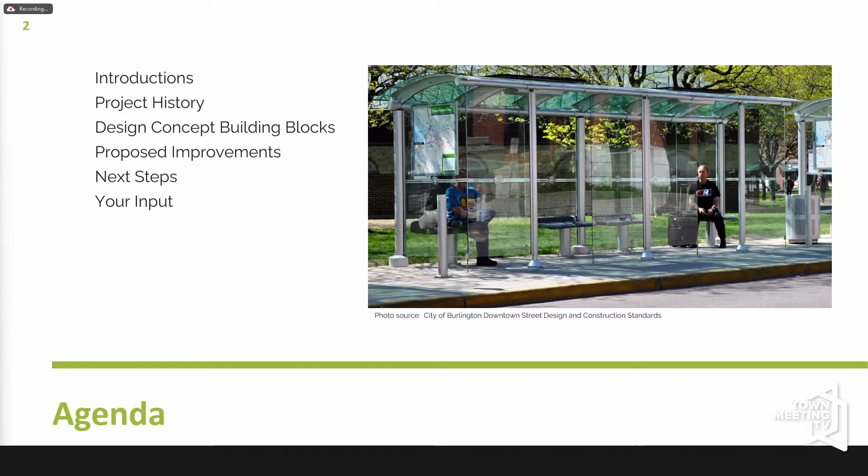Brief rundown of the staff, which we just went through. This project actually started back in 2016, when voters approved a tax increment financing, TIF-funded project for improvements to Bank and Cherry Streets.

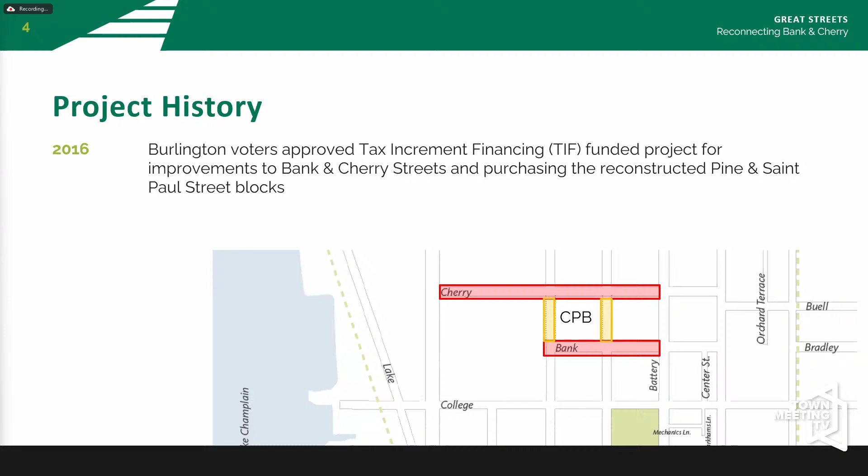This also included funding to purchase Pine Street and St. Paul Street from City Place Burlington, the developers. With that funding, the city advanced designs for Bank Street and Cherry Street. At that point, the project ended at Church Street, which is the boundary of the TIF district. They got city council approval for their concept in May of 2018 and advanced the design to the 75% phase, so it was pretty fleshed out at that point.

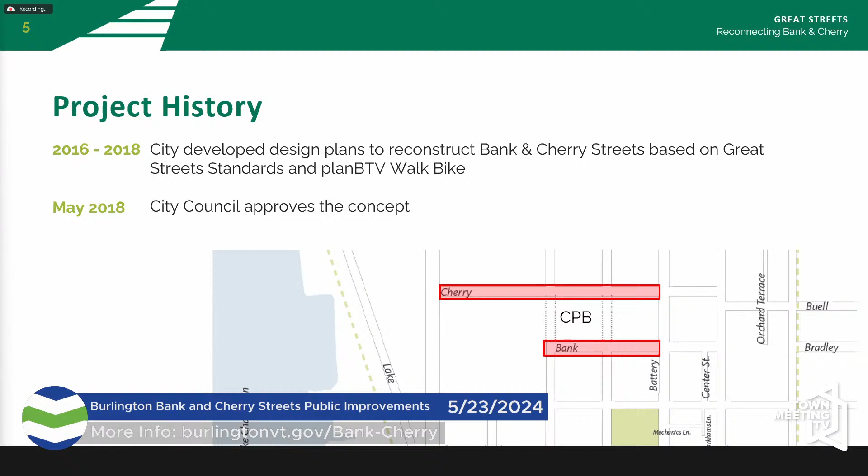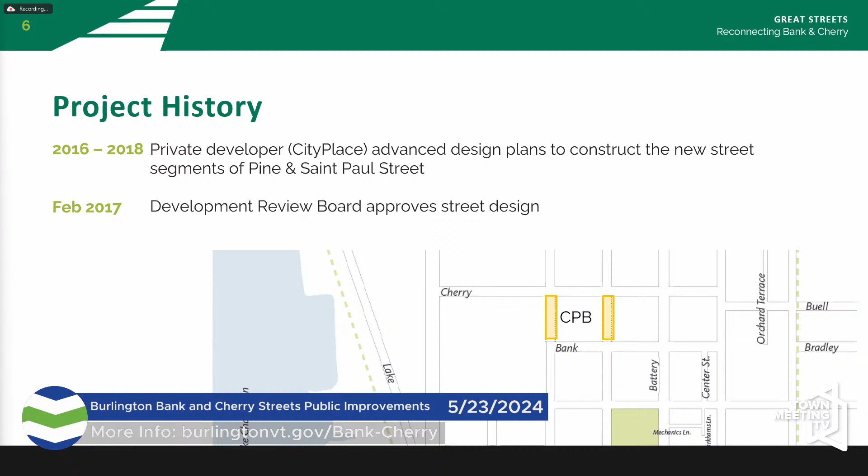Simultaneously, the developers were developing designs for the St. Paul and Pine Street segments that are reconnecting the downtown. They were going through a different process and were approved by the Development Review Board in February of 2017 for the concepts of that street.

Then in 2018, the City Place project, which was providing our TIF funding, stalled. And so what we affectionately refer to as 'the pit' was born. All of the street project paused as well.

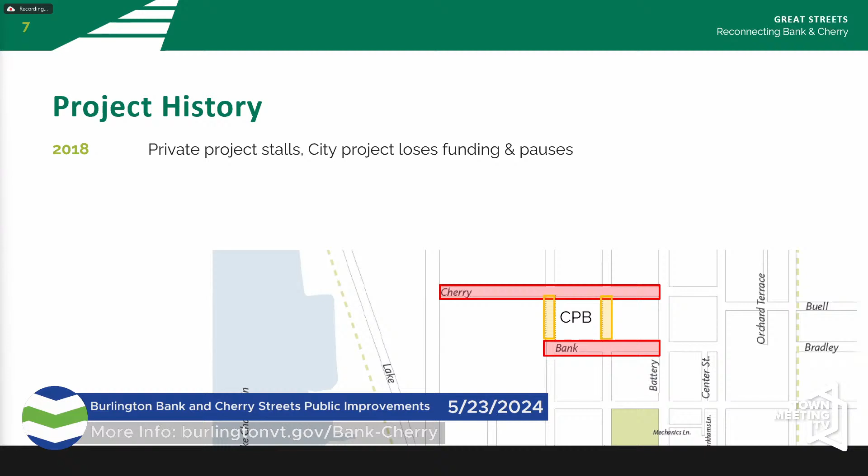Since then, the city has been looking for different funding opportunities so that our street reconstruction wasn't tied to the TIF funding anymore. Last year, we were fortunate to receive two big federal grants. We got $12 million from the congressionally directed spending from Senator Leahy, specifically for Cherry Street. And we also got a $22 million RAISE grant to add the Bank Street and Pine Street and St. Paul Street segments.

With this new federal funding, we're not constrained to just the TIF district anymore. So we were able to add the most eastern blocks of the project area and rebuild the entire corridor for both Bank and Cherry going all the way to Winooski Avenue, so that we have a consistent corridor.

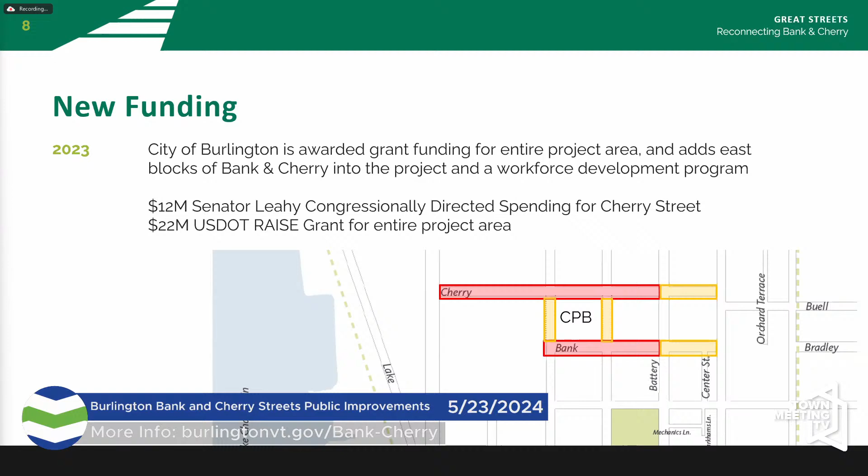As part of the RAISE grant, we were also awarded funding for a workforce development program that our Business and Workforce Development Department is managing for us. And Cara from the city's Workforce Development Department is going to talk a little bit about that.

Great, thank you. Hi, I'm Cara Al-Nasrawi, the Director of Business and Workforce Development for the City of Burlington. A trend that we're now seeing in some of these large federal grants for large capital projects is a workforce development portion that goes along with the grant. So my team will be managing that portion. It breaks out to roughly $1.5 million.

We are supporting Burlington residents in either building a new skill set or changing their skill set. We will be partnering with local organizations who are accredited in this curriculum space, and we will be running throughout the project cohorts of students who will learn about Construction 101, Weatherization 101, and things of that sort. So it's actually a really great opportunity that this grant comes with this funding as well.

So the city is not only completing this project with these funds, but we are also able to provide fully funded training, which would include childcare. When they graduate, they would have a set of tools, heavy equipment operation skills, and through these programs they will also have on-the-job training, including on the project itself. We'll be managing that for the next four to five years.

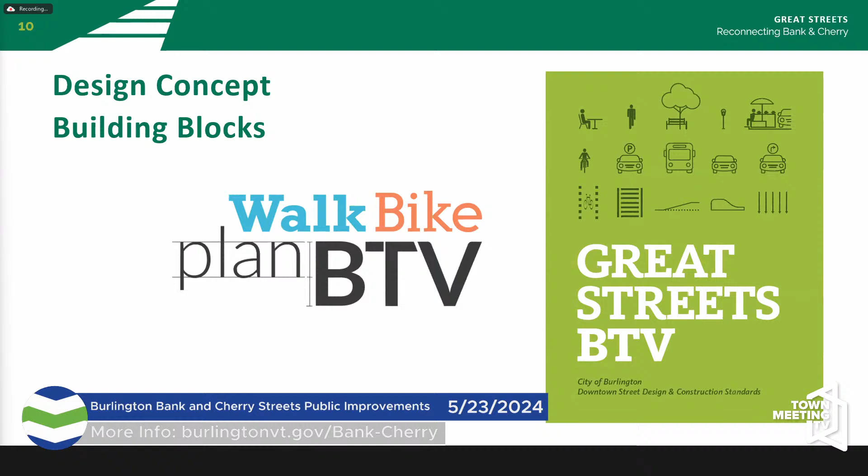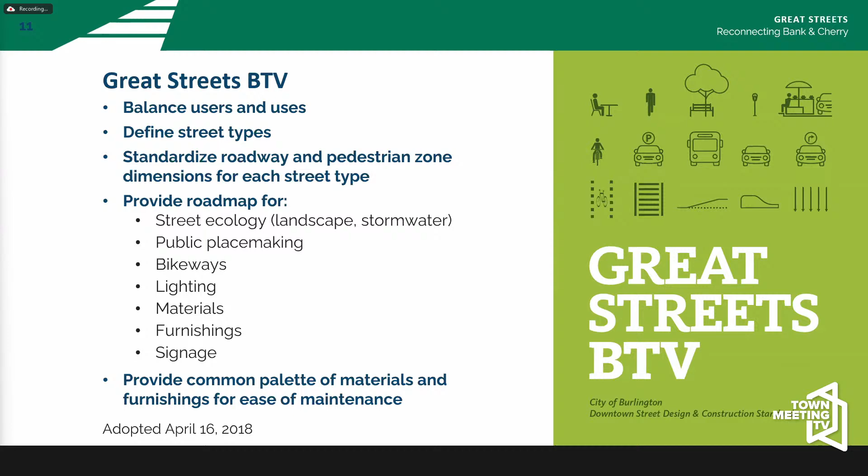The Great Streets BTV Downtown Standards was really a deep dive. It was adopted in 2018, and this is kind of our guidebook for balancing users and uses in the right-of-way and defining what streets downtown do what. It also provides a lot of standards for the types of materials we'll use downtown, so we have a consistent language across our downtown grid, and also stormwater opportunities to get runoff infiltration, so that we're not sending too much water into Lake Champlain without being treated, and also improved lighting.

The other document is Plan BTV Walk Bike, which for our downtown really creates this slow zone with shared streets where there's traffic calming and shared lanes in the downtown core. And then Pearl Street and Main Street are really our major bicycling corridors that connect to our broader network.

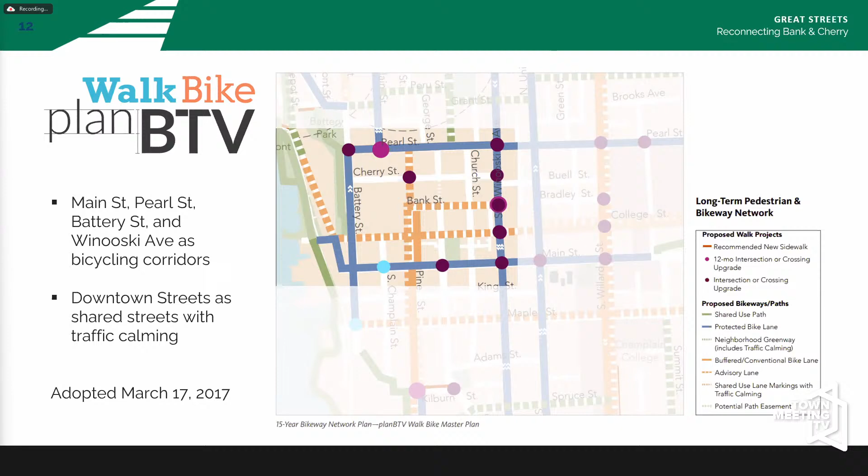And with that, I'll pass it off to our consultant team to discuss some of the improvements to our street.

All right, I'm Patrick Olstad with SE Group. I'm a landscape architect, and I'll just kind of give you a quick overview of some of the streetscape elements we have here. So this shows you the overall downtown area that this streetscape project encompasses.

So you can see on the far right would be South Winooski Avenue, and that's sort of the eastern limit of the project. The northern limit of the project is Cherry Street, and the southern limit is Bank Street. And as Julia mentioned, we have these new street connections running north-south with Pine Street and St. Paul Street, with the City Place project between them.

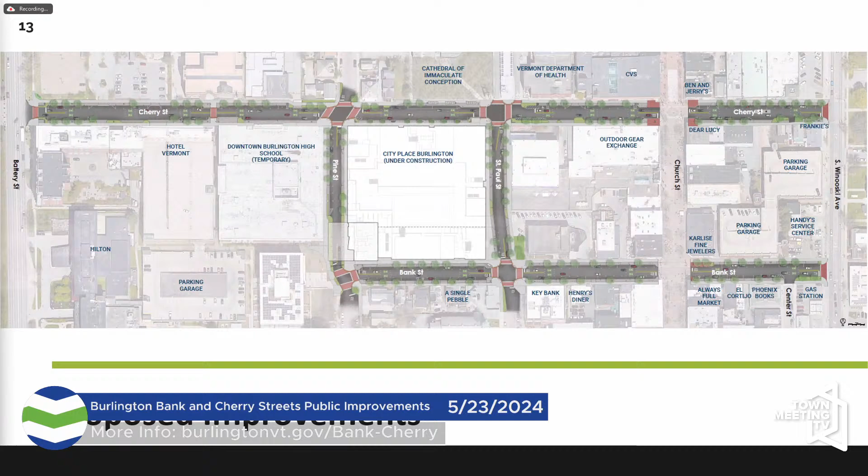Let me just run through here. So this is a section on Cherry Street, a typical showing of the spatial relationships between the road, the street, and the sidewalk. We're really trying to create pedestrian and bike-friendly street environments while also accommodating the necessary turning movements of emergency vehicles and larger trucks.

So really trying to find a nice balance here, maintaining a fair amount of on-street parking as we can, while also looking for opportunities within the sidewalk zone to create maybe some small gathering areas. We'll see that in certain places. We also look for opportunities for stormwater treatment.

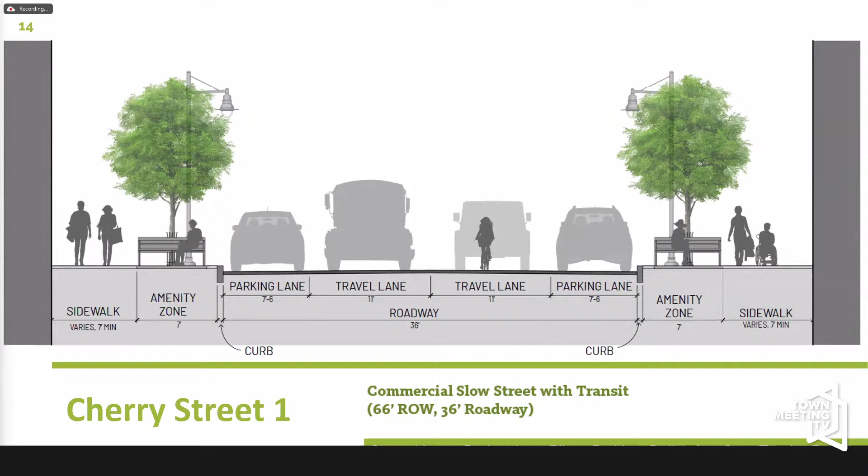So we're making use of these bump-out spaces in different locations. You can see the typical section is a sidewalk zone right next to the buildings, and then an amenity zone between the sidewalk and the road. That amenity zone is where all the streetscape elements like street trees, street lights, benches, bike parking, and parking kiosks are organized.

As you can see on the current St. Paul Street project constructed a few years back, it follows some of that same model, with a strip of permeable pavers that allows water to infiltrate into the ground. The trees are provided with underground soil, which is a pretty significant investment to get street trees to grow well in an urban environment. We're using soil cells, a structural component underneath the sidewalk, that allow for a lot more good planting soil for the trees to grow and thrive.

We're also looking for opportunities in the streetscape for public art. Some of this is what we want to hear from people on the boards in the back, and there's an online version too, where there are interesting opportunities to enhance the character of the downtown. For site furnishings, we have standards, but there could be opportunities for variation here and there, maybe with colors. I think we want a unified downtown aesthetically, but maybe a little different character on some blocks.

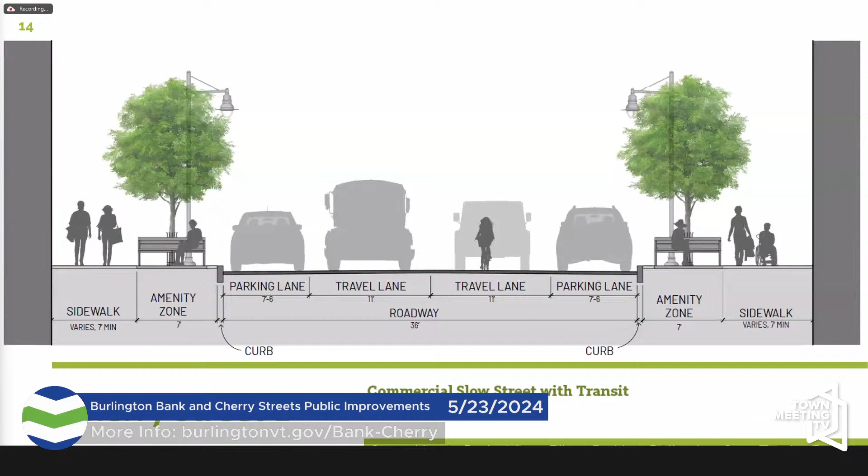Let's keep running through this. This shows a different section on Cherry Street, further to the east. It shows an area for stormwater planting in one of the bump-outs, and things like bike parking within that amenity zone.

This one shows, a little further, the idea of having some kind of public gathering space in front of Frankie's restaurant, where we thought it could be cool to have outdoor dining space, maybe some granite benches and plantings to get a little buffering from the road, and a really nice place for people to sit.

That would liven up the streetscape. So this shows the plan version of that. You can see on the east where that gathering space is, close to South Winooski Avenue. There's a small potential stormwater space just to the left of that, and then you can see the typical street with...

...what are called sharrows, or shared bike and vehicular lanes. The pace of traffic on this street should be pretty slow. They're not very wide lanes, and there's a lot of visual stimuli to keep drivers going slow. You can see quite a bit of street trees to create shade and beautification.

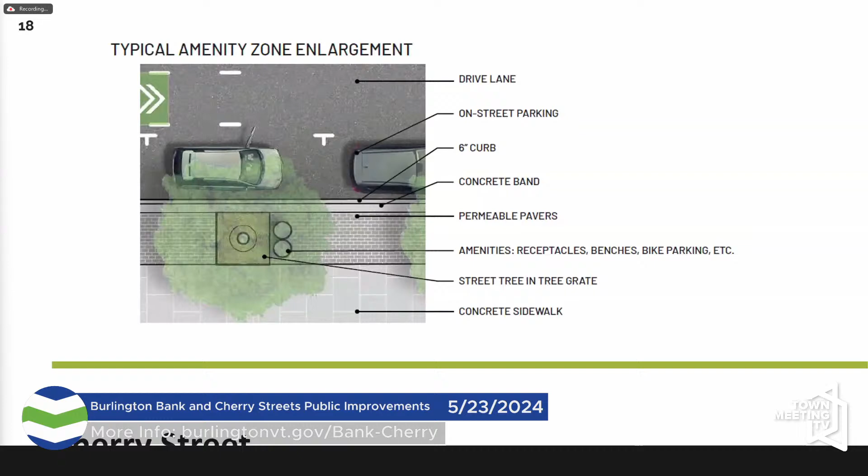Okay, so on to Bank Street. The big exciting thing on Bank Street is that it's being proposed to go curbless. That's a pretty big change from what people are used to, but it's a really exciting opportunity to change the character of that street and make it more pedestrian friendly. The idea is that it could be a festival street, closed off for outdoor events, more in the European model of how streets are dealt with. But it would still accommodate all the normal turning movements of vehicles.

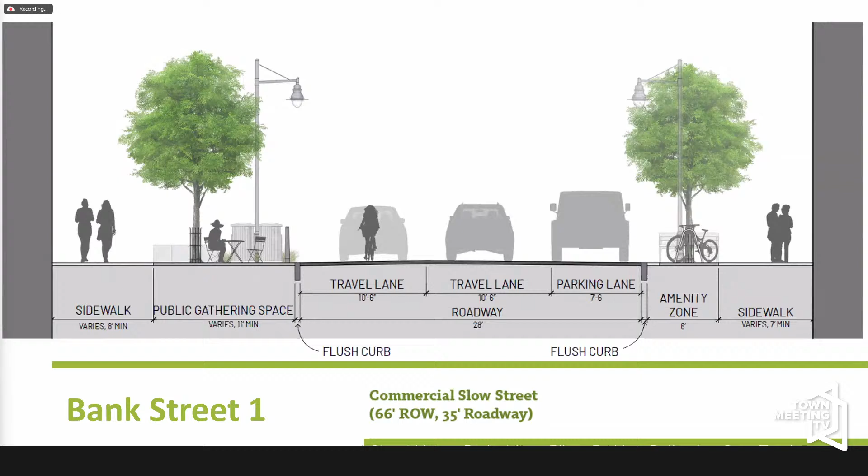Going curbless does create some additional design considerations. For example, for anyone with visual impairment, we have to be conscious of people not just wandering into the street. So we're proposing tactile warning bands along the edge where the sidewalk and amenity zone interface. Safety, of course, is a very high priority with all these streets.

But it does create some really interesting opportunities for wheelchairs. Yeah, all these streets are designed to be as wheelchair friendly as they can be. So yes, that is another goal of this project, to improve the downtown's accessibility. We have designated accessible parking spaces with breaks in the curb to allow direct connection to the sidewalk, and very smooth surfaces for wheelchairs.

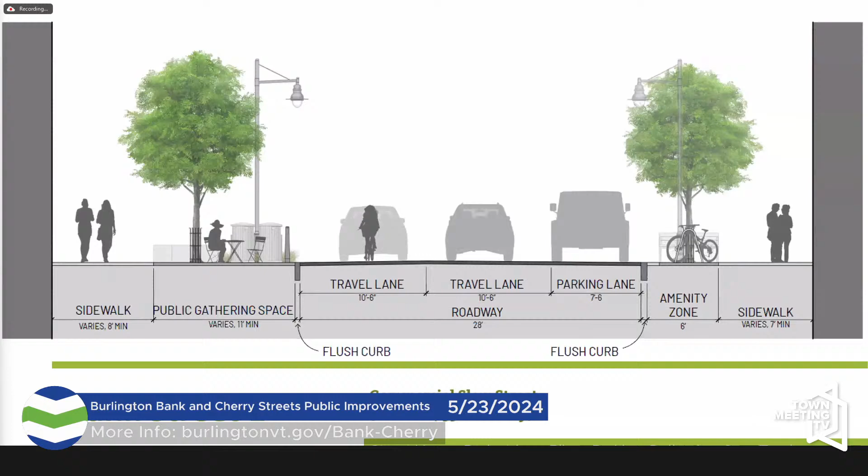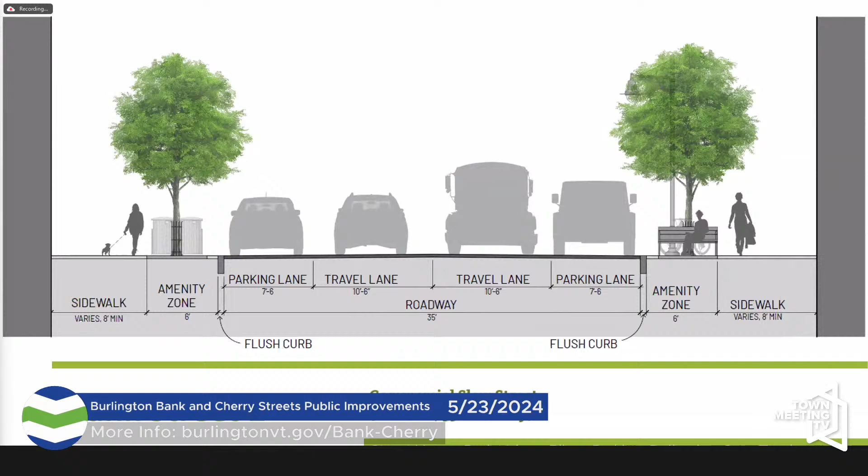So this is another typical block section on Bank Street. You can see the benches, street trees, and that's the plan view. This shows the idea of trying to capture some of the space for stormwater treatment, potentially on that lower southeast block, and maybe some kind of public gathering space on that northwest block. We showed some tables and chairs out there, which may not make that much sense given the current use of the jeweler that's there now, but just the idea that it could be any number of things that can encourage outdoor gathering. So that's another thing we'd want to hear from people. Should that be just more of an informal space? Should there be fixed permanent seating? Should there be public art? I think there are a number of options that can be considered there.

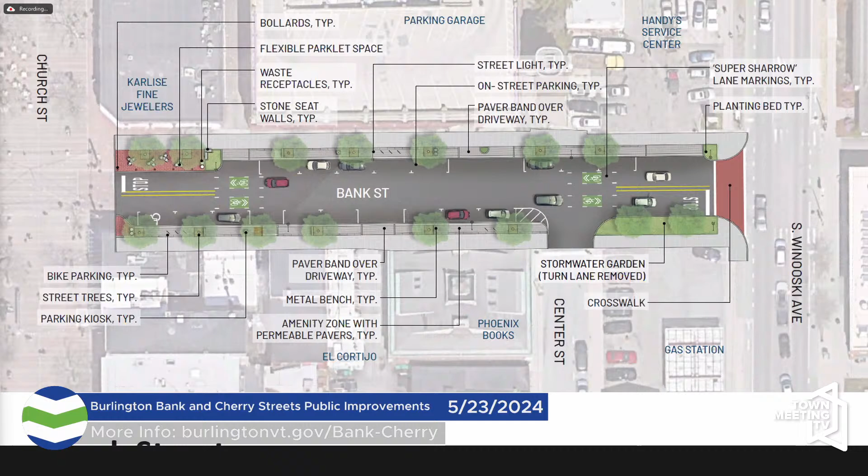Why not leave the benches there that have been there for years and let people sit there? Yeah, well, we are upgrading all the site furnishings on these new blocks, but there will be benches in the design for sure.

Flush curb means it's just the road and the sidewalk are in the same plane. So there's no curb, typically you have a 6-inch curb, but here it's just all in the same plane.

Should we run through the whole thing first, or? Yeah, okay. So this shows a typical detail for Bank Street. That shows the tactile warning strip I was mentioning at the edge of the sidewalk there, the permeable pavers and the concrete band, and then the curb that's just flush with the road.

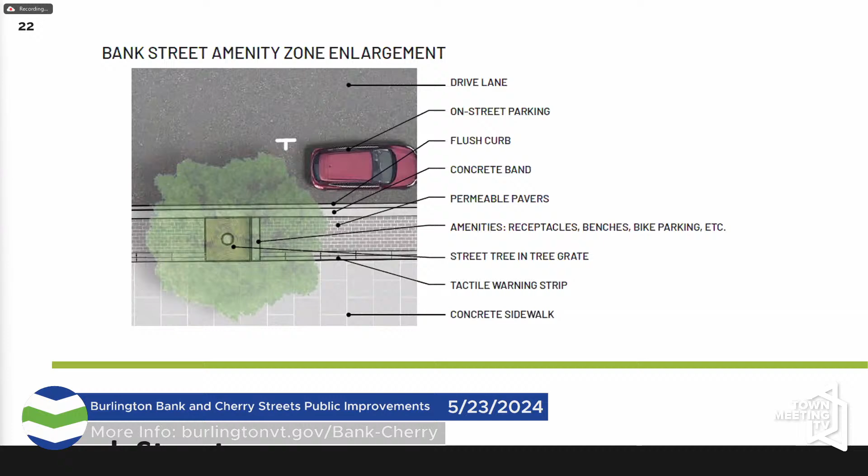Wouldn't some people get confused, the ones crossing the road, since there's a sidewalk but no curbing between it and the road? Can you repeat that question? I said, wouldn't some people get confused crossing the road onto the sidewalk since there's no curbing? So the question is, would people get confused crossing the road onto the sidewalk when there's no curbing? I think it could take some getting used to, but the crosswalk treatments are actually pretty similar to where people should be crossing, compared to a regular road.

Some people don't use it, they walk in the road. And if there was a thing where the sidewalk and road sort of intersect, like a crosswalk - I'm visually impaired, and I have seen a lot of people jaywalk in the middle of the road, and I said, no, I'm not doing that, I'm using a crosswalk. So what about crosswalks for people who are visually impaired?

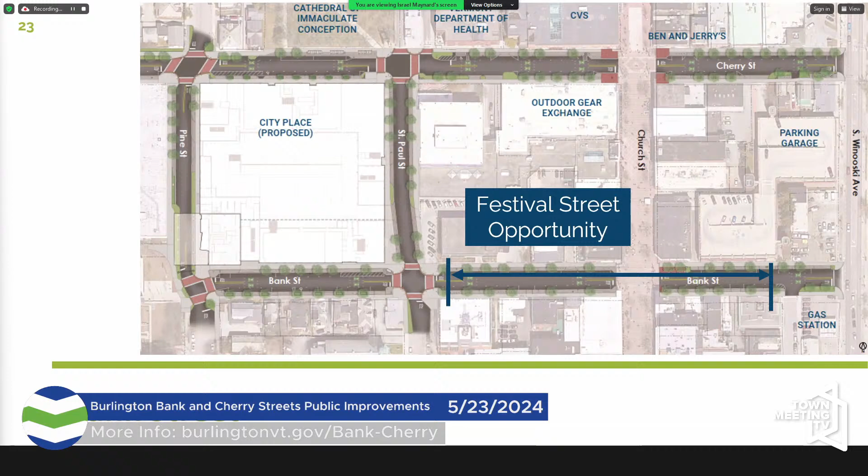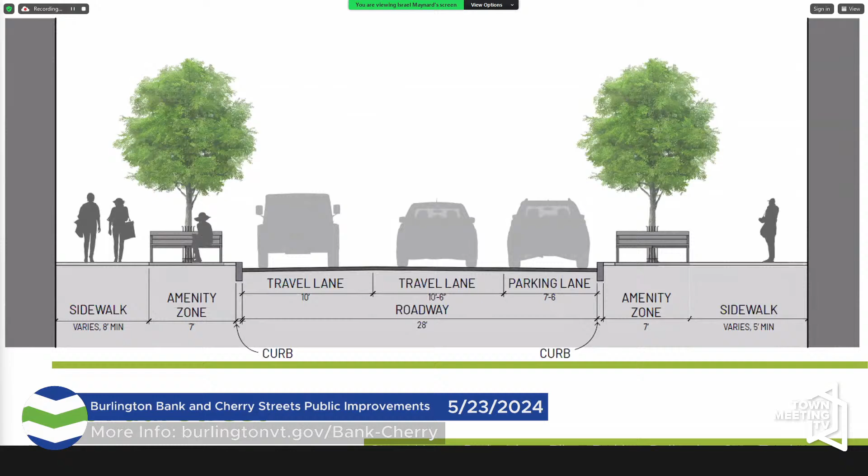Okay, I'm going to keep moving. So this is St. Paul Street, one of the completely new blocks, showing a typical street there. Again, pretty similar kit of parts with the amenity zone and sidewalk.

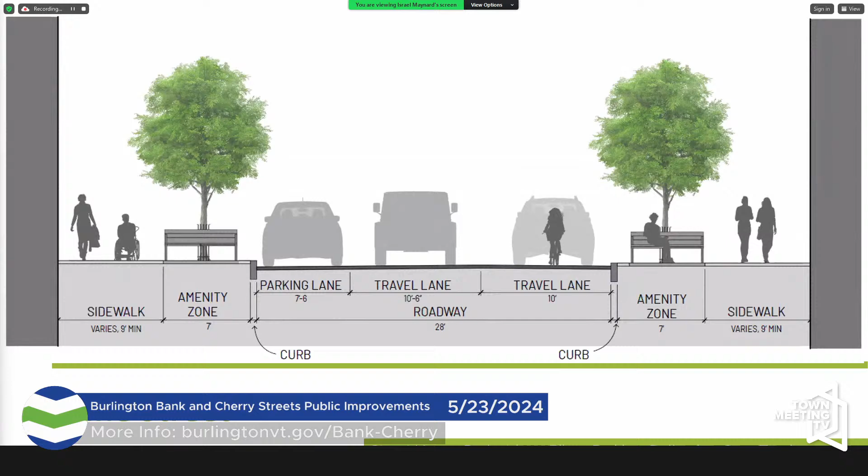So I'll turn it over to...

Hey, so I'm Israel Maynard. I'm also with the design team, so I'm going to take you through next steps, and then we'll get into questions. For next steps, we have a couple of additional public meetings coming up: the Church Street Commission, also the Public Works Commission, likely in June, and then City Council for approval on June 24th.

That isn't the last public meeting we'll have as part of this project. There's going to be additional follow-up with a public information meeting after conceptual plans, but for now those are the upcoming ones.

Design development for this phase is June to October. We're planning to have the conceptual plan package fully developed in October, and then we'll get into the NEPA review, which can be a lengthy process. After that, we'll do the final design and then permitting and right-of-way. That's anticipated to be April 2025 to May 2026, with construction starting on Cherry Street in 2026 and then Bank Street in 2027.

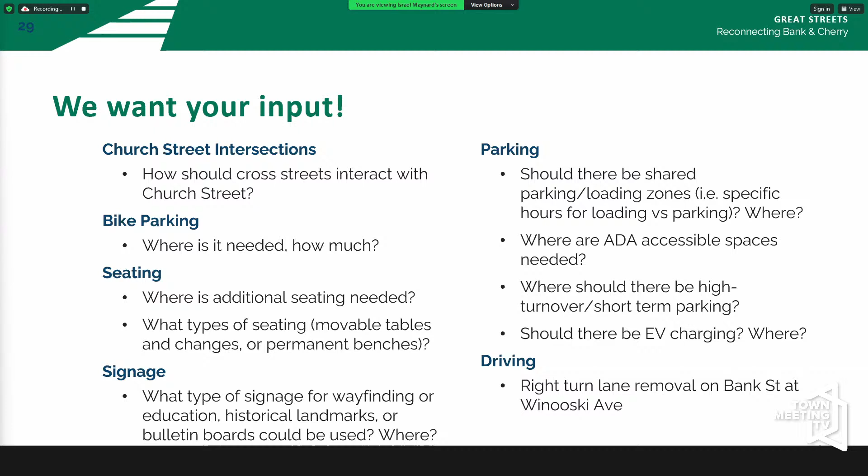We really want to hear about what those intersections should look like, what we should have for bike parking, where seating would be appropriate, what type of seating—fixed benches or movable chairs—what type of signage for wayfinding people want, and if larger signs are needed for people who are visually impaired.

All the signs will be compliant with the Manual on Uniform Traffic Control Devices, which sets the minimum font sizes for signs, so we'll definitely make sure those rules are followed.

The other thing we want input on is parking—where the shared loading zone should be, what the hours should be, whether people want more short-term or longer-term parking. We definitely want input on ADA accessibility, the Americans with Disabilities Act, for those accessible spots we were talking about earlier, where high-turnover parking spots should be, and where EV parking should be if included.

We also want to talk about operations. One thing Patrick didn't note on Bank Street is that we're actually looking to remove that right turn lane, so instead of having a left and a right, it would be one lane for all movements. We believe this will increase the safety of that intersection by narrowing things up and giving vehicles on that side street the ability to move out a bit before crossing into the garage.

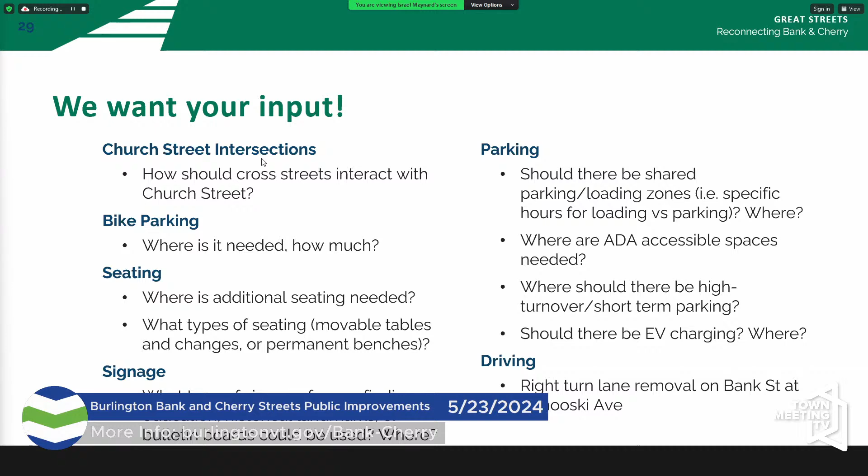Since they got that new road called Champlain Parkway, are you going to be putting in signals near Cherry Street? So the question is, with the Champlain Parkway construction, would we be putting in signals near Cherry Street? Yes, because Cathedral Square has a lot of elderly people. I think there's an intersection at Battery and Cherry, or a signal at Battery and Cherry. I'm talking about Champlain Parkway connecting into it. Champlain Parkway doesn't connect there, there's no one there. Battery Street is connected to Champlain Parkway, but the Champlain Parkway project ends before you get anywhere close to Cherry or Pearl.

Well, we live on Cherry. Cathedral Square lives on Cherry Street. So there'll be intersection control at Pine and Cherry as part of this project. When Pine Street gets reconnected, that will involve some traffic control there that should help out. And that's what I'm talking about. Yep, all right, thank you. Thanks for the question.

Another thing we want to hear from today is, what is Bank Street's character? What is Cherry Street's character? What kind of colors do people want? Should everything be uniform, or should we have multiple colors in our amenities? Here's some ideas of what the different amenities we might have out there are.

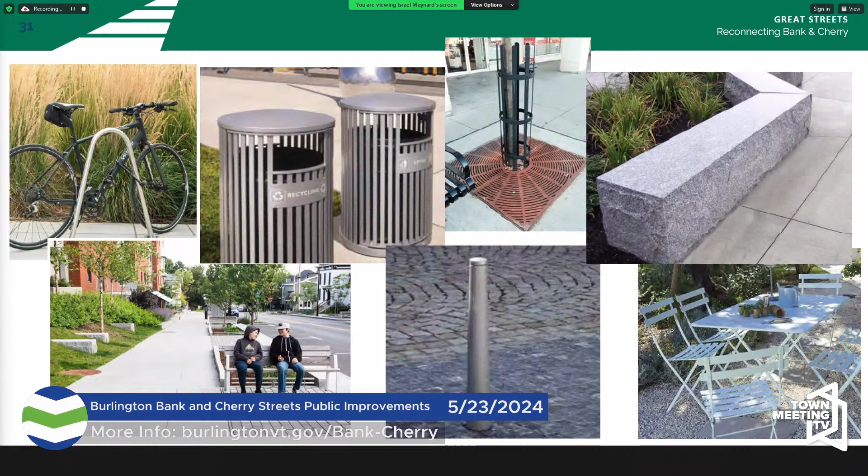Let's start right here. So I would like to go back to this feature of the flush curb street. I didn't hear a rationale that seemed... I didn't hear really any rationale, but maybe a hint, maybe it felt a little bit like a design inspiration that doesn't have an explanation. Is there some way of explaining why it seemed like a valuable thing to do?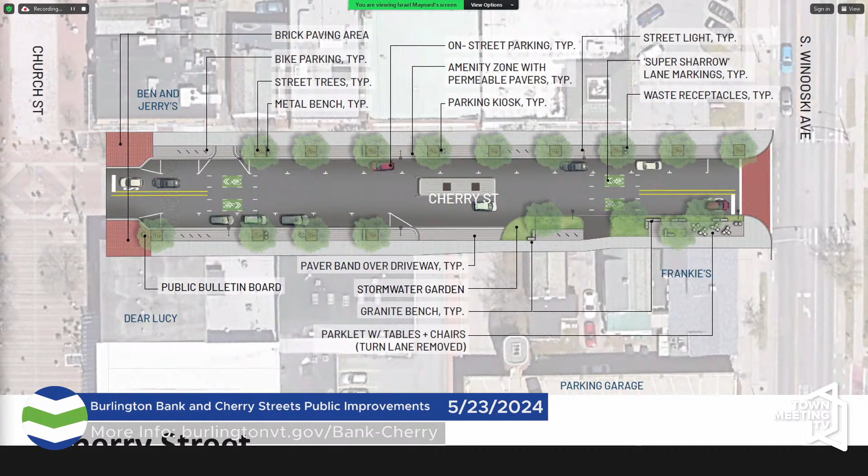Question right here. I have a couple of questions. One is about the lighting. In the cross-section pictures you showed, the lighting is contained in the street, not the sidewalk. Are you trying to light the sidewalk as well as the street? Is the lighting height set so that it's more friendly for people walking?

So the question was whether the lighting will be for just the street, or for the entire right-of-way including the sidewalk. That is the intent - lighting will be started in preliminary design, but a full photometric layout will be done as part of final design to show actual lighting levels on the ground. It'll be tested for normal things like uniformity, to make sure you don't have really bright spots and then really dark spots. They will check to make sure there's no shadowing in areas where people would be crossing the road, and things of that nature will be checked with the lighting design.

So these sections just show a sample of what the lighting would look like. There may be situations where there are two luminaires, or one on the back if required.

Okay, the second question is relative to parking. We have, even in the projects we're going through here...

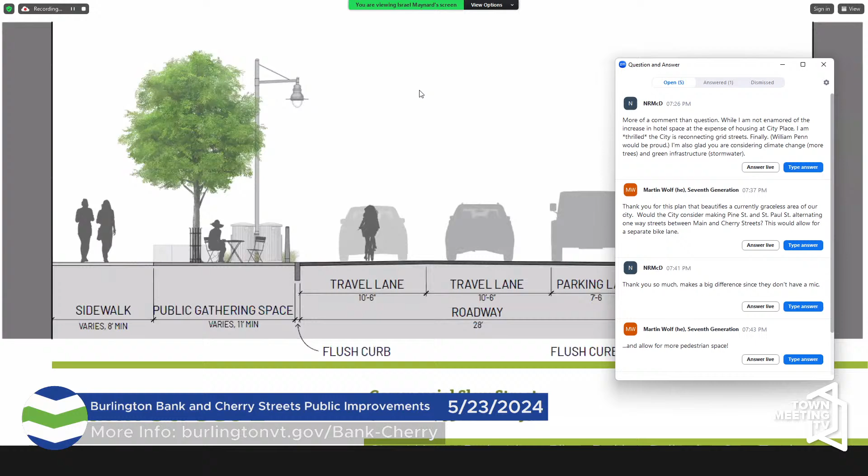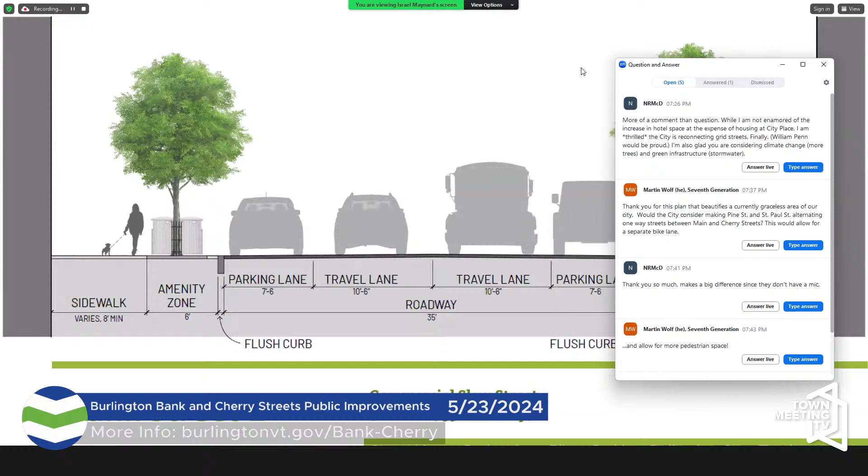That's all we have in the Q&A for now. We'll go back to the room, right in the front row. I have two questions and a comment. Sure, I'll break them up.

You put the time frame for starting construction on Bank and Cherry as 2026. What is the time frame for doing the work on St. Paul and Pine?

That construction is partially occurring concurrently. Some of it will be done as part of an early phase as the building is built, so the streetscape won't be finished until the 2025 and 2026 construction. So those will be built concurrently.

So they're 2025, 2026, and then Cherry and Bank are... did I mess that up? Sorry. 2027 for the cross streets, Pine and St. Paul are 2027 — just put it on the slide and I wouldn't have to explain. Next time, put it on the slide. They start with Bank Street and follow its construction.

Second question: are you undergrounding all the utilities on these streets when making these improvements? Cherry already has underground utilities, I believe. Bank Street will be undergrounded under the current plan. Cross streets will also be undergrounded.

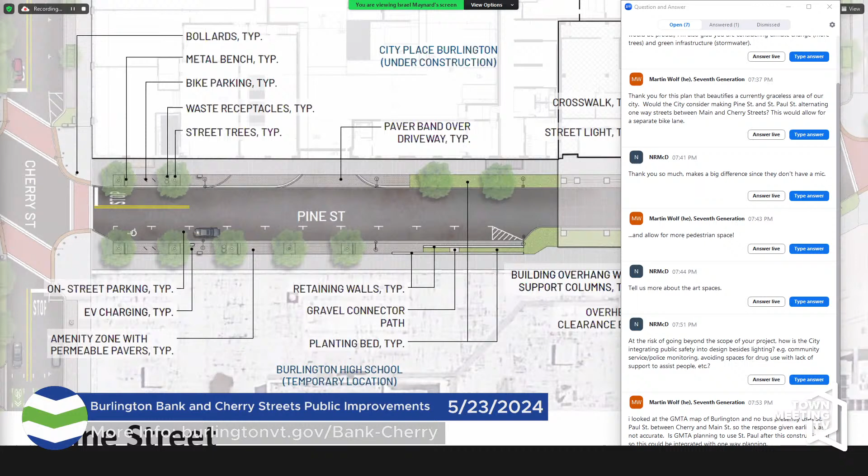There's a comment that says, at the risk of going beyond the scope of your project, how is the city integrating public safety into design besides lighting, e.g. community service, police monitoring, avoiding spaces for drug use with lack of support to assist people?

The Great Street Standards started to look at that. We engaged the police department as we were picking out ways that the amenity belts would be organized, making sure that there were not long linear features for places for people to hide behind. Things like bulletin boards have visibility underneath. So that is the way we're trying to ensure that the right-of-way space side to side is transparent, so different activities can be seen and noted.

One of the questions that usually comes up pretty often is about benches and how they can have sometimes unattractive activities, but really the benefits of starting to repopulate benches uniformly throughout our right-of-way corridor is going to make it so that these activities, where you might find somebody choosing to rest on a bench for a longer period of time, become a more dispersed activity. These folks don't always want to be congregated in high concentration groups.

A lot of times, one of my favorite memories before I worked for the city is walking around Battery Park, and there was a houseless gentleman out there, and my dog, who was leery of every individual, just loved running up to him. And he just wanted to be on his quiet park bench.

Our rights-of-way don't have benches anymore, and so with Main Street, St. Paul Street, and now Bank and Cherry, we're really going to repopulate that and provide seating opportunities for all of our citizens. But that is probably the area we still struggle with the most, the activities that sometimes happen on benches.

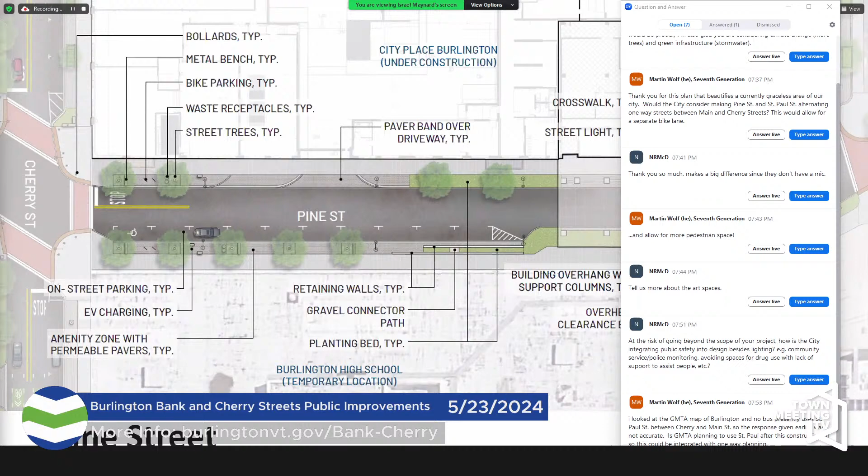So the question is regarding whether public toilets and drinking fountains are being considered as part of the public improvements. I'll let the city answer that one. That is certainly a challenging topic. There's not any currently planned within this immediate plan. We would certainly welcome comments or notes about it. We do receive it occasionally. Having had that request, we also have found that management of a public restroom does require staff to be very proximate.

Cherry Street and Bank Street, proximate to the marketplace, might have that ability of city staff. As the city considers the downtown improvement district, maybe we might have staff that could support that cleaning and monitoring of those types of facilities, but at this immediate moment, we do not. It would be worthwhile to look at where one could be sited and maybe installed in the future. I don't know that the city will be ready in the time frame that we're ready to construct, but it is a great point that we should plan for it. No drinking fountain necessarily, but it would be a welcome comment.

Comment over here. Question.